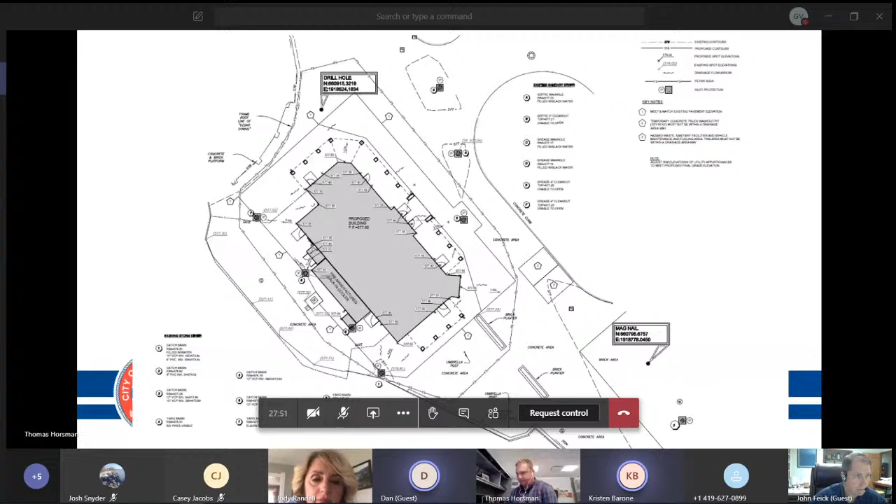Not hearing anything. Let me check here. He's listed in the room. Adam, are you able to hear us? I see his name, his initials pop up. Well, let's move forward with this.

We've had this request before from Cedar Fair. I think the sports park was the last one we'd seen this on, and we've done this on several other venues at Cedar Point. From what I can tell, and correct me if I'm wrong, maybe Josh should weigh in, but there is a base flood elevation that the federal government establishes, and the city of Sandusky establishes a buffer 2 feet above that. What Cedar Point is asking for is a variance to go up - they're still above the FEMA elevation, but they're 8/10 below the extra 2 feet. Josh, is that correct?

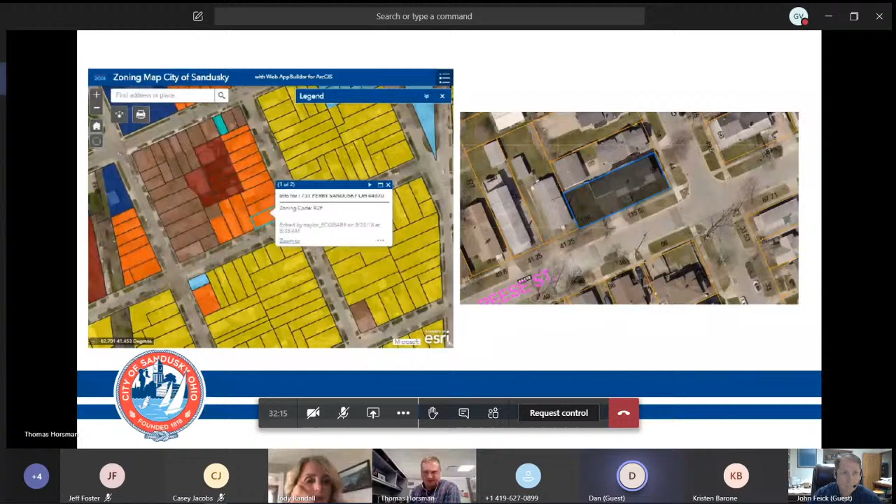731 Perry Street. It is a multi-family zoning district. The parcels are outlined here on the screen for you to see. The applicants are John and Dell McDonald. They had submitted an application to construct a carport, which would be constructed against the back end or the western end of their garage. The code does not allow for any encroachments into the required backyards for carports. And due to the orientation of the yard and the size, this would impede into the required backyard. However, if it were detached or an accessory structure, it would meet all the required setbacks, but because it's being attached to the house, it is determined that it is part of the structure.

So that is the variance they're applying for, and staff has recommended for approval. I'm not sure if the applicants are on, are either John or Dell on the line to speak any further about this request? Apparently not. Let's go to the board.

Dan or Walter, do either of you have any questions on this variance? No, they're going right off of that garage. Is that the garage they're looking at, that 2-car white garage? As I understand it, that's exactly what they're doing, yes. So 10 feet. Yes. And there's nothing from the neighbors. We don't have any input from the neighbors. Do they have any issues? We have not received any feedback, either positive or negative, from neighbors about this.

Okay, Walter, do you have any questions? No, I don't. And it sounds like the motion is in order. Mr. Chairman, motion that we pass the variance on this property. I'll second that. We have a motion by Walter, second by Dan to approve this variance. If you call the roll, please. Mr. Delahunt, yes. Mr. Matthews, yes. Mr. Pike, yes. That variance is approved.

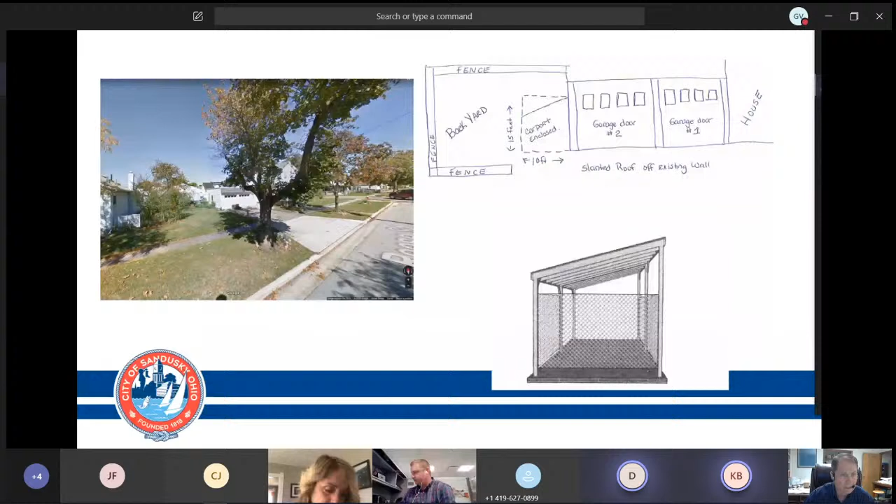Next item up is an application for an area variance to construct a 4-foot fence in the front yard at 606 Wayne Street. Get the staff's report, please, Tom. Yes, thank you, Mr. Chairman. This was an application submitted by Casey Jacobs, who is on the line I see here.

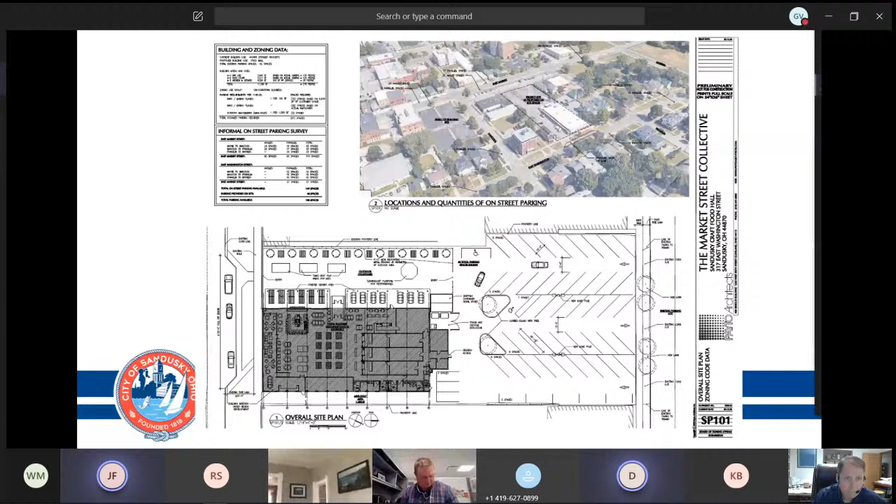I'm looking at the plan, and it shows that along the entire south side is the tables and chairs inside. And then in the front on the west side, right next to where the old entrance used to be, I'm guessing that is a bar. Yes, that's correct. So you have seating that wraps along where the checkouts were in the Cardinal, and then in that center section there's a group of picnic table type seating, some common seating, and as you work your way northbound to the rear of the building, you have three vendors, which would be different food operators. And then there's one on the western side intended to be more of a coffee/bakery operation that can serve at different times of day. So each of these would be a different type of food operator.

Correct. So what our variance request is, as Tom had mentioned, by zoning code we'd be required to have 97 spaces on site. Our site allows for 48 on-site spaces, but from our informal windshield survey in the 2-block surrounding areas, there's 147 on-street spaces. Combined with what we're providing on site, that's a total of 195 spaces, a little more than twice what would be required on site for us.

And as we've talked about, there's a lot of walk-up traffic as well that will come to and from this site. So we feel that combining that on-street parking with the 48 spaces we're providing on site is more than adequate for our function.

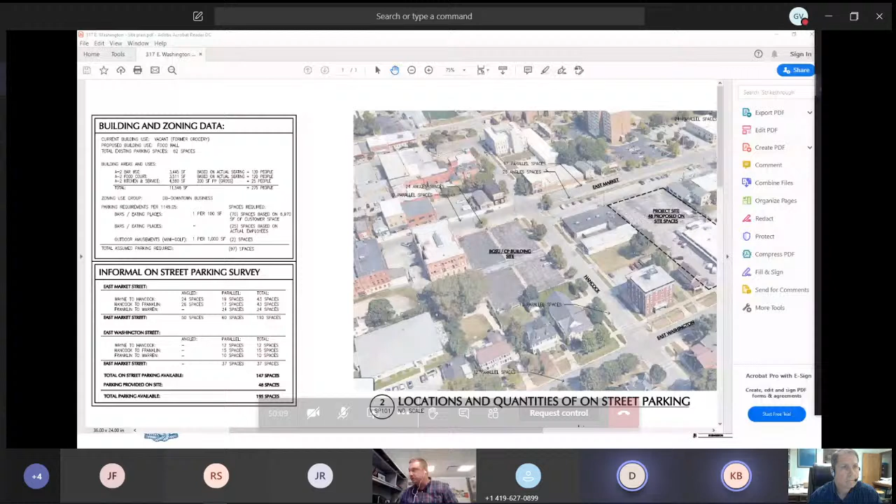Through you, Mr. Chairman, this is Tom. Yes, that is a City of Sandusky owned parking lot. Okay, and is it the plan to have the students at Cedar Point that are residents park in that lot? Through Mr. Chairman, as of now, our downtown parking residential permit policy does allow for the residents that have permits to park in any of our residential or any of our city lots.

We're currently exploring more ways to add on-street parking, especially on the East Market block just to the east of Franklin. The right-of-way is fairly wide, and there's no striped parking there. So staff is just looking at various ways that we can increase the number of on-street spaces in the general vicinity to make sure there's adequate supply for the increased demand that these two projects would bring online.

Well, my concerns are, if we allow not meeting the required parking requirements for this parcel, and then we add in the Bowling Green Cedar Point, which is going to be taking a lot of parking, and I look in that neighborhood, East Market, because of the gym that's there on the corner of East Market and Hancock, that parking lot and the street is jammed at 3 different times during the day. I'm just wondering if we're going to have enough parking.

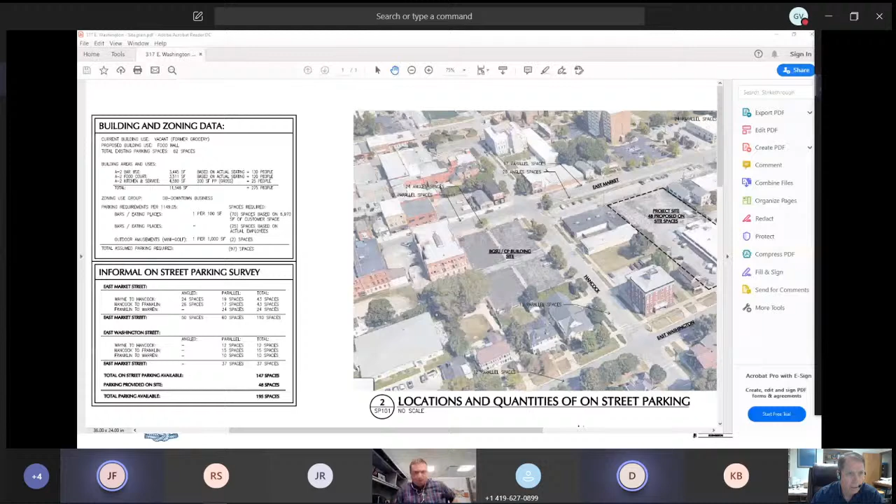I understand where you're coming from. I'm just again concerned, parking is going to be a big deal here if the Cedar Point Bowling Green thing, which is going to open up in September, and all their apartments, we're going to have a ton of people that are going to need parking. And I don't want to saddle everybody else who's already here, both residential and commercial, with people parking in places they're not supposed to. You've got a high rise over there with parking, you've got cable TV that provides their own off-street parking.

That's just my comments. I'm very concerned with taking parking away, and that we're not providing enough to start with. I think you're right there. That's only me talking right now, but I have a hard time approving this. I would be more inclined to table it for a month and have you come back with a study and show me where everybody is going to park, both for the Bowling Green and the numbers that are going to be there if the building is fully occupied, all the apartments and the Bowling Green classes are in session. How many people that's going to be, where these people are going to park, combine it with this food court where 275 people could potentially be here, and look at it next month and review it at that time, if that's enough time for the city or Mr. Foster to put together the numbers.

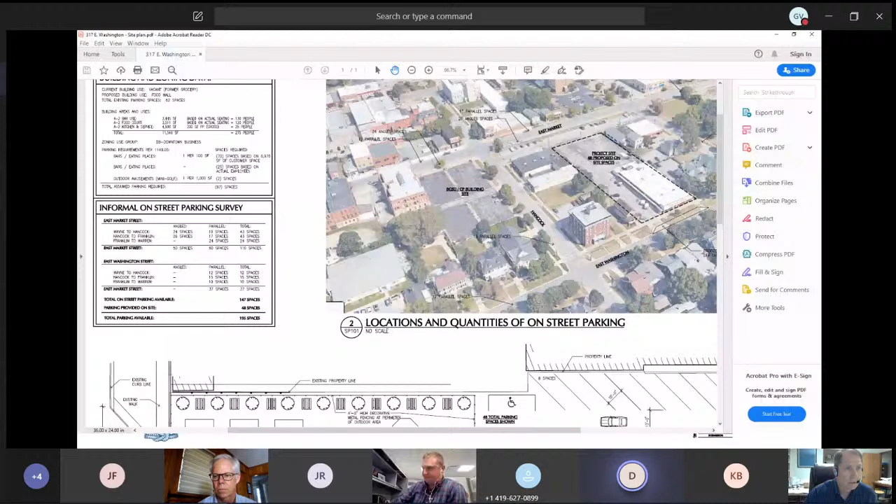Great, good to see you, Dr. Siemens. Then we'll go to the next item. It's an application for an area variance to reduce the amount of required off-street parking spaces at 609 East Perkins Avenue. Tom, if you give us your report.

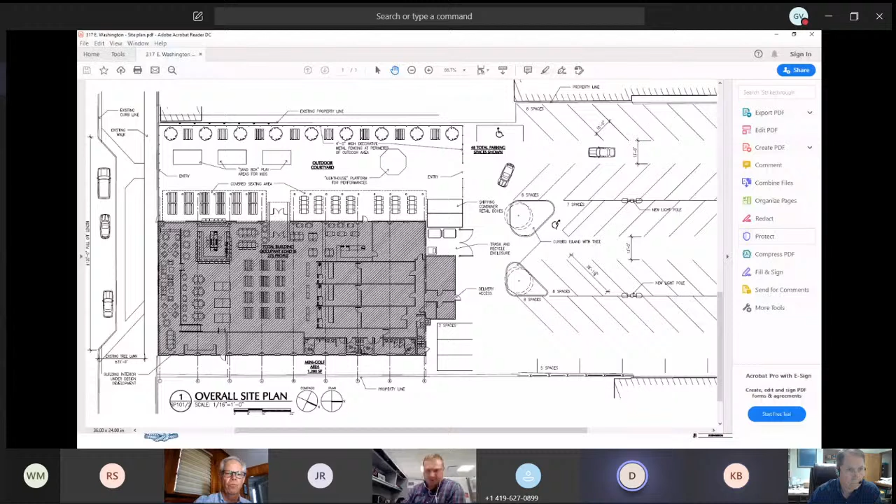Thank you, Mr. Chairman. This is another parking variance request based off of the required parking for a restaurant facility at 609 Perkins. This is a proposed reuse of an existing structure, an old Long John Silver's structure, that the applicant is proposing to turn into a carry-out Pizza Hut establishment. There is a slight revision in the site plan that has been submitted.

The proposed variance would be 11 parking spaces, down from the required 18 that the code would require. The other variance is to allow for the lack of a 3-foot landscape buffer on the east side of the property due to space constraints. This property is going for site plan approval again at the Planning Commission, planned for next week.

Staff believe because the parking requirements were based off of a restaurant, a dine-in facility, that they did not adequately reflect the use going here, which will be a carry-out facility where people will just park and carry out. So staff did think the variance is appropriate and recommends approval. We do have a representative from the applicant on the line as well to answer additional questions or give additional comment. We did not receive any neighbor input on this project.

I'm not sure who's here on their behalf, but if they would tell us their name. Jason Tusing here, property owner. Also on the line or available for comment is Rod Steiger, the franchisee from Pizza Hut, and also Chris Howard from Bramhall Engineering. But as it was described, I don't really have any additional comments to add.

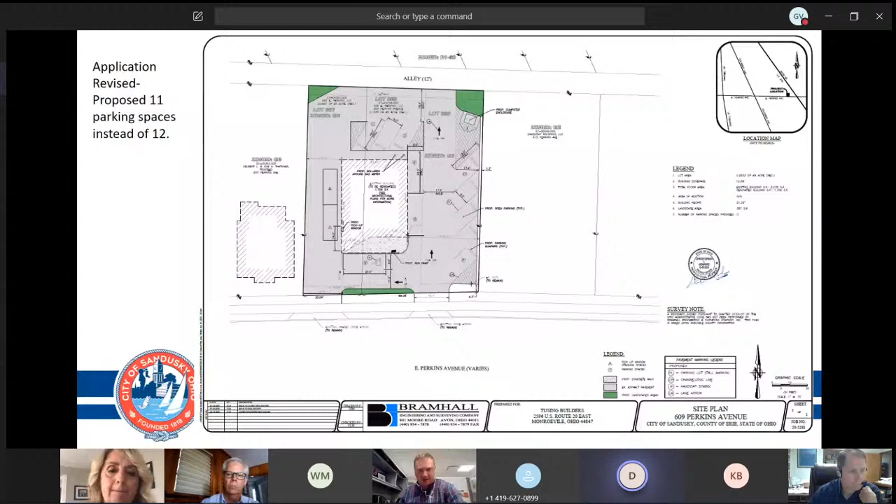Jody Randall is the applicant who's on the line with us and can give more additional information, but there was quite a few pieces of information that she submitted with the application that were included in the staff report. We as staff did not receive any comments from the neighbors, either for or against this proposal. But to be consistent with staff's recommendations, because it's a use variance and the standard for those is very high, staff told the applicant that staff did not believe there was an unnecessary hardship due to the strict application of the zoning code, so we were unable to recommend approval as we have in the past. But Jody is on the line to answer any additional questions or give more information.

Okay, if there's nothing else, Tom, let's go to Miss Randall.